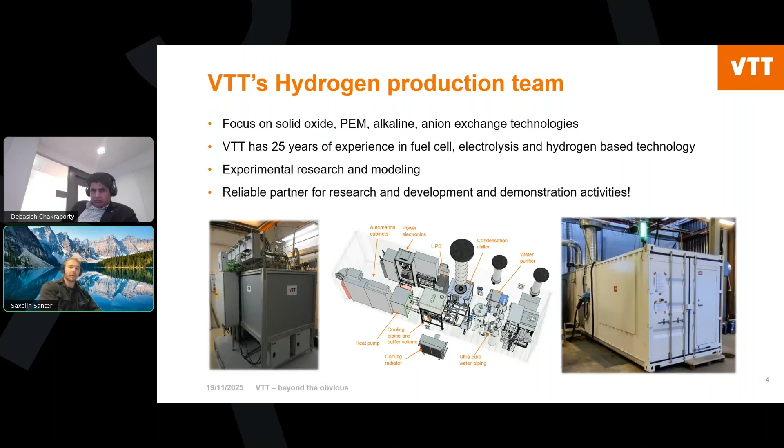Okay, so what is ammonia? Basically, ammonia, when it's used as a fuel, is a hydrogen carrier. The molecule itself contains 3 atoms of hydrogen and doesn't include any carbon. So this means that when ammonia is combusted or oxidized, it doesn't produce any carbon dioxide emissions, which is basically the biggest motivation behind this idea of using ammonia as a fuel. However, this requires green hydrogen production, so we also need to handle that.

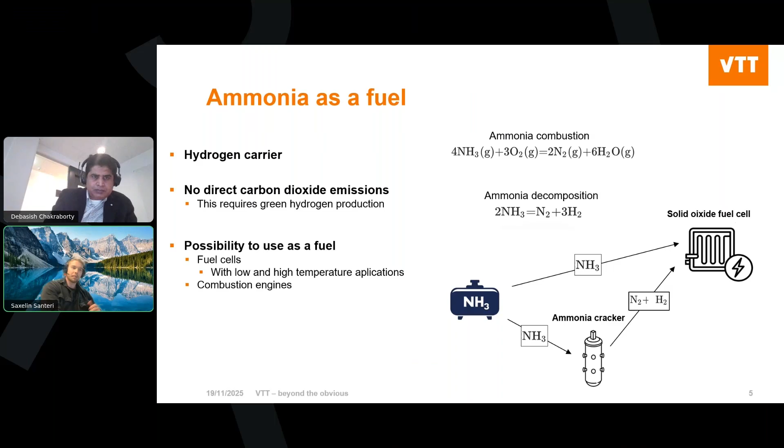Ammonia can basically be used in 2 different ways. You can use ammonia directly, for example, with the solid oxide fuel cell, where the ammonia is used to create electricity or power for some device or application. Or you can crack the ammonia to hydrogen and nitrogen and then use that fuel feed in the solid oxide fuel cell or combustion engine. That would probably be the most practical way, to crack the ammonia to a degree that it's manageable to use in the devices. But on this topic, we will hear more in the later presentations.

Another motivation behind ammonia is the energy density it has. It has quite high volumetric energy density. For example, if you compare it to hydrogen, it's even a bit better than liquefied hydrogen, because it has a considerably low point where it liquefies. So already at 8.6 bars at room temperature, you can have liquid ammonia. So it's easily stored in containers or gas bottles.

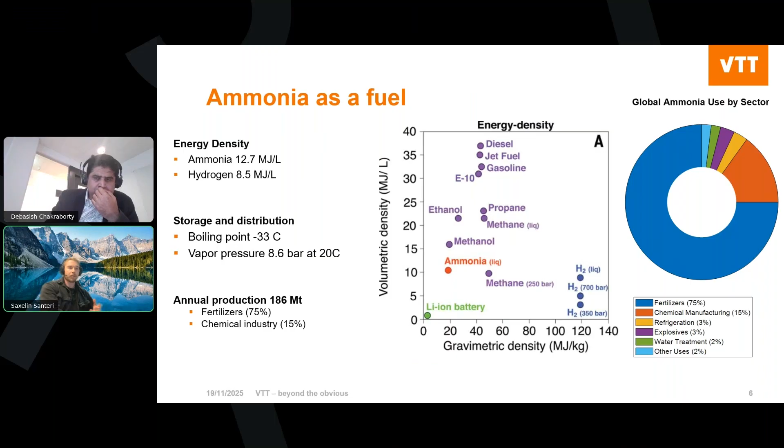It's also quite widely used in industry, for example, in the fertilizer and chemical industry. So it's not that new a substance to be used, and we already have ways to deal with ammonia. But then the issues with ammonia, basically,

And you can see it's already damaged quite a lot. So basically, the ammonia has nitrated the whole sample into ceramics. So we need to find a way to handle the ammonia in the high temperatures.

Other issue is the safety. So ammonia is an extremely hazardous substance. It's causing damage to the cells and tissues. Already at 30 ppm level of concentration, it's considered harmful if you are exposed over longer time, and 5,000 ppm when it's inhaled, it can already cause death. So it needs to be handled carefully if you want to use it safely.

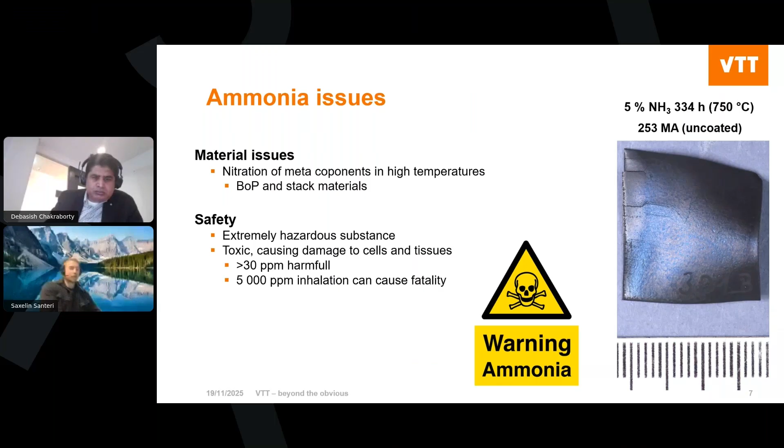Then the introduction to the FUELSOME project, which was the trigger for having this workshop from our side. So in this project, the aim is to develop a solid oxide fuel cell technology for long distance shipping applications that can be run with ammonia and methanol. The project was started in 2022. It has 2.5 million euros of EU budget, and it's a 4-year project. So at the moment we are in the last year of the project. And in the consortium, we have eight partners.

To give you an idea what we are actually doing in the project, I'm going to go through the objectives and give details on whose responsibility is each objective. So the first one is to design and model a complete technology concept from production to end use, taking into account the fuel quality and storage and distribution requirements for this technology concept. This is the responsibility of AEE and Warsaw University of Technology.

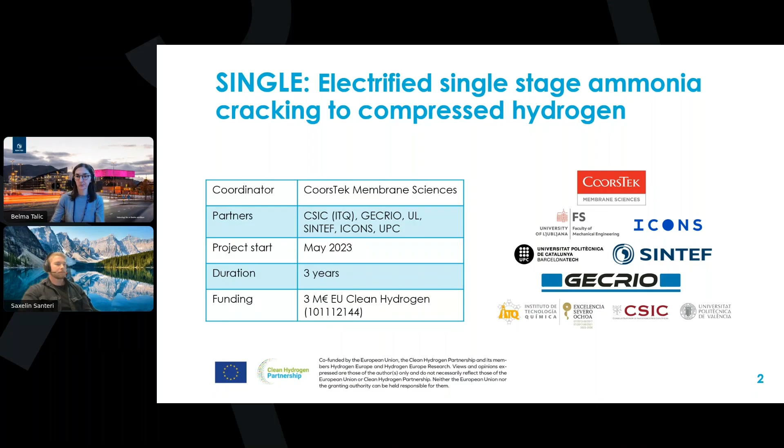The overall aim of the SINGLE project is to develop and demonstrate an ammonia cracker module that's able to produce 10 kilograms of hydrogen per day. The system itself is based on a so-called proton conducting ceramic electrochemical reactor, which integrates the processes of ammonia cracking inside with hydrogen-nitrogen separation across the membrane and electrochemical compression of hydrogen into one single-stage process.

This process intensification allows for tight coupling between, on one hand, the endothermic ammonia decomposition reaction, and on the other side, the exothermic processes of hydrogen separation and compression, which enables us to potentially increase the overall energy efficiency of the cracking.

The reactor itself and the module will be operated at temperatures up to 750 degrees centigrade, aiming to deliver hydrogen up to 30 bars. Because of this proton conducting membrane, the proton conductivity of the membrane relies on humidified feeds.

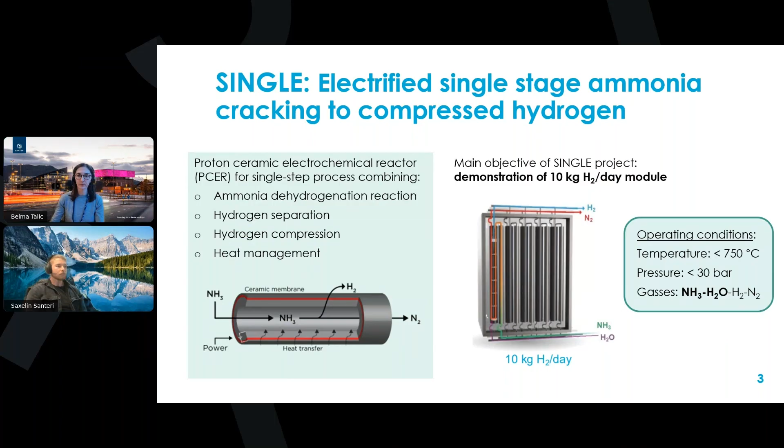The system will be exposed to wet ammonia containing gas mixtures. So in addition to the proton ceramic membrane, which is really the core technology, our ammonia cracker system will also include several so-called balance of plant components.

These are typically heat exchangers, pumps, valves, piping, and so on, which will all be exposed to wet pressurized ammonia at high temperature.

There's a lot of knowledge available on the nitridation resistance of alloys from, for example, ammonia synthesis and nitriding of steels. But most of this knowledge is based on dry conditions and also at slightly lower temperatures than the maximum operating temperature that we are aiming for in SINGLE.

So one of the key tasks of the SINGLE project was to identify alloys which were able to tolerate the specific operating conditions that we have, so that we can operate it safely.

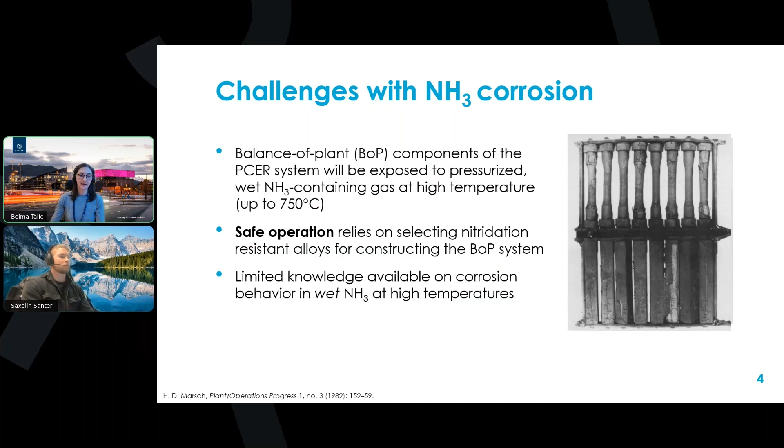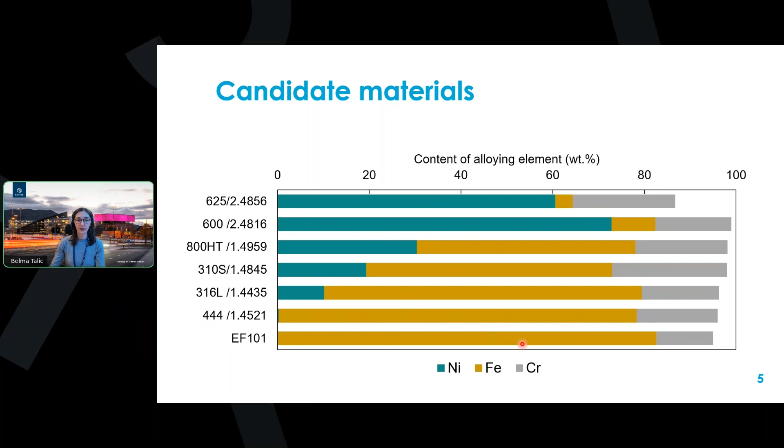Compositions span from high nickel and low iron content on the top here, to low or no nickel content and high iron content at the bottom.

To study the nitridation resistance of these alloys, we at SINTEF established a dedicated ammonia corrosion rig that allows us to carry out exposures to ammonia containing gas mixtures at up to 20 bars of total pressure and temperatures up to 900 degrees centigrade.

The system is made with an in-house gas mixer where we can send in nitrogen and hydrogen gases and mix them with liquid ammonia and liquid water, heat everything up to evaporate the liquids, and mix them together before sending it into the reactor.

The rig itself is located in a dedicated ammonia lab where we have high ventilation capacity, several ammonia sensors, and other necessary safety features to operate safely.

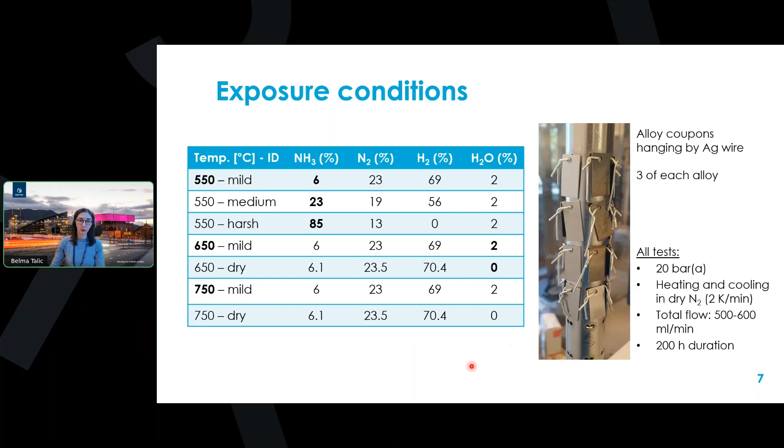All of these 7 exposures were done at 20 bars of total pressure for 200 hours duration. And we did heating and cooling in a dry nitrogen atmosphere.

To evaluate the nitridation resistance, we recorded the weight of the alloy before and after exposure to ammonia. Generally, we saw that the mass gain corresponded quite well with the extent of nitridation.

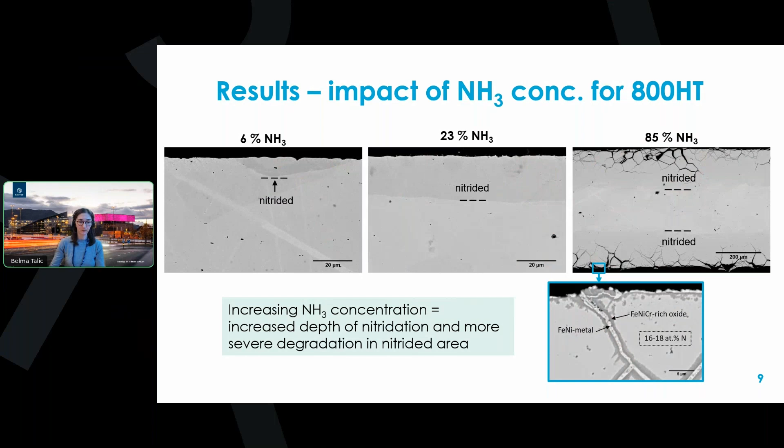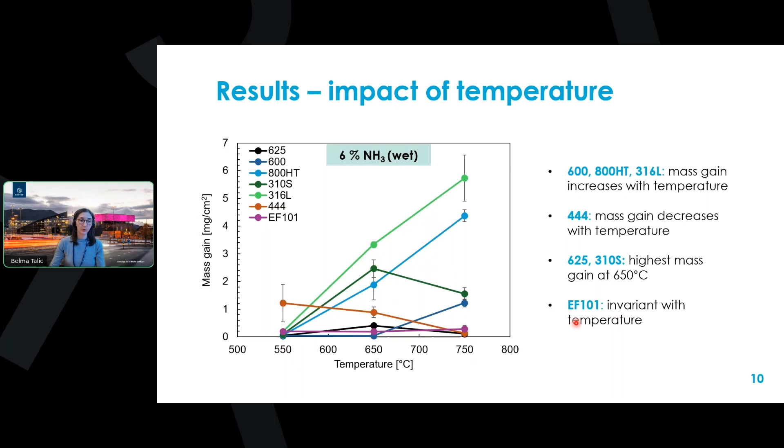The alloy 625 and 310S had a peak at 650 degrees centigrade, but again 625 was quite low on mass gain at all conditions. Finally, the alumina forming EF101 was quite invariant with temperature.

The differences in temperature dependence of the different alloys can, to a large degree, be understood if we inspect the sample cross-sections in SEM. Here we see the ferritic stainless steel 444 and the nickel-based alloy 600, shown at 6% ammonia, at 550, 650, and 750 degrees centigrade.

For 444, at 550 degrees there's an even layer that has become nitrided, with some cracking starting to occur in the nitrided zone. When we increase the temperature, we see increased depth of nitridation, but the nitrogen content has slightly decreased, and we don't see any cracking anymore. Then at 750 degrees, for this alloy, we don't see any nitrogen anymore.

Instead, we see that a surface scale has formed on top of the alloy. With EDS and XRD, we could see that the scale was composed of silica closest to the alloy, followed by chromia and manganese chromium spinel.

As already mentioned, these tests were done with humidified conditions, 2% steam. It is clear that the added steam was sufficiently high in oxygen partial pressure to oxidize this alloy, and the oxide layer that formed probably acted as a barrier against nitridation.

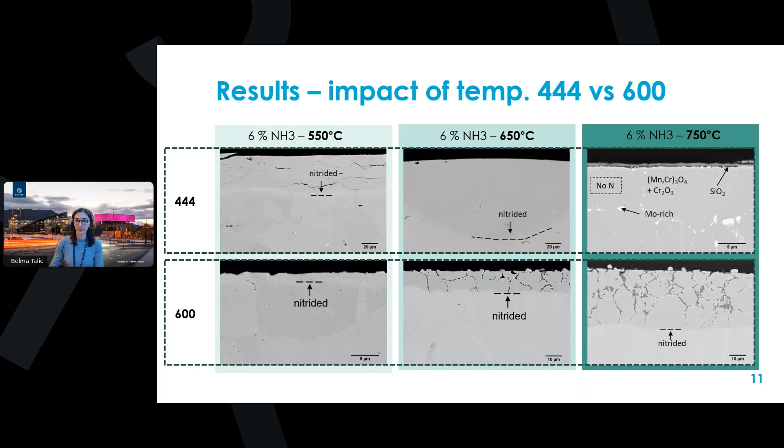The final results that I will show are on the impact of steam, which we compared at 650 and 750 degrees centigrade, in both cases with 6% ammonia. Also in this case, the impact of steam depends on the type of alloy. For most of them, we see the same tendency at 650 and 750, so I'll remove the 750 to add some key points here.

For alloys 625, 600, 800 HT, and 316L, we see that the mass gain is lower in dry conditions, while for the ferritic steels 444 and EF101, we see that the mass gain is lower in wet conditions.

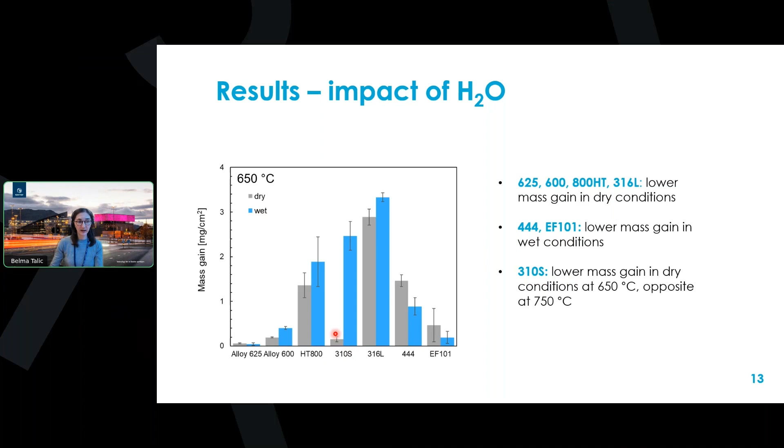So I said that for most of the alloys this was the same at the two temperatures. The only exception is the 310S, which at 650, shown here, had the lowest mass gain in dry conditions, while at 750 we had the lowest mass gain in wet conditions.

Again, we look to the SEM to gain a better understanding of what is going on, using the alloys 444 and 600 as examples. For 444, we already saw that in wet conditions at 750 degrees, we were able to mitigate nitridation by forming a continuous oxide scale on the surface.

When we switch to dry conditions, the partial pressure of oxygen is insufficient to cause any oxidation of the alloy. So instead, we are allowing nitrogen to go into the alloy and react, forming chromium nitrides.

For alloy 600, we see that the extent of nitridation, as we saw from the mass gain, is lower in dry conditions than in wet conditions.

To understand this, we measured the degree of ammonia decomposition at the outlet of the test reactor using FTIR gas analysis. What we saw from this was that at 750 degrees in wet conditions, more of the ammonia was retained at the outlet compared to dry conditions.

In other words, we had more cracking of ammonia inside the reactor in dry conditions than in wet. So in practice, the alloys were exposed to a higher concentration of ammonia in wet conditions than in dry conditions, and this is probably why we see a higher degree of nitridation in wet.

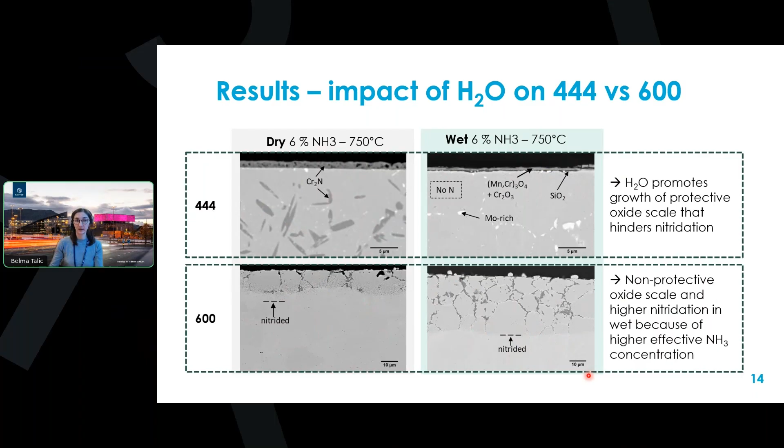So I finally reached the conclusion. In summary, what we saw from this study, studying 7 different alloys and 7 different exposure conditions, is that generally nitridation resistance increases with decreasing iron content and increasing nickel content of the alloy.

We saw that the ammonia concentration had a very large impact on the nitridation potential, and it led to increased degradation of most of the alloys.

We also saw that increasing temperature and wet ammonia increased nitridation of many alloys, but for some, such as the ferritic stainless steel 444, it can actually mitigate nitridation because it promotes formation of an oxide scale.

Steam had an impact on both oxide scale formation and ammonia decomposition. So depending on the type of alloy, it can both decrease and increase nitridation of the alloy.

And finally, we concluded that alloy 625 was the alloy we tested that had the best resistance when we considered all of the different testing conditions.

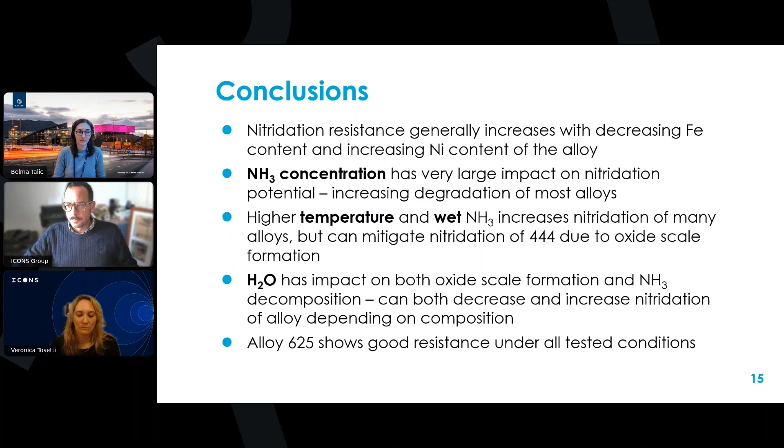The second is actually a funny question. So I saw that you're using 316L tubes. Do you inspect any damage on the tubes, or how often do you need to change them?

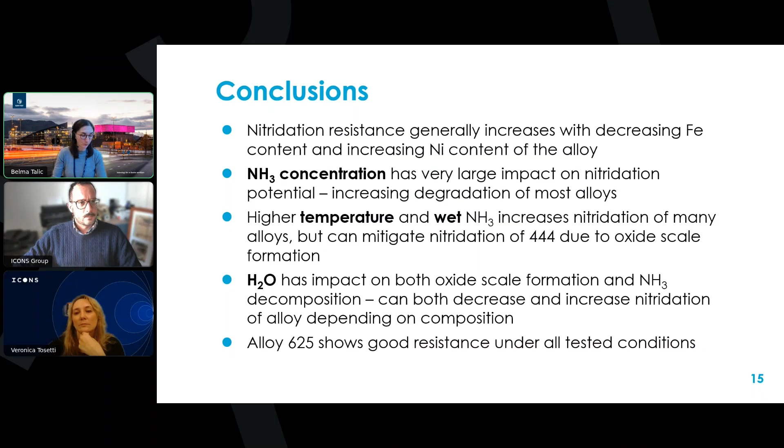Thank you, thanks a lot for those questions. Regarding the chromium evaporation, I don't believe that it's impacting our mass gain results that much. We should remember that although we're adding 2% steam, the atmosphere otherwise is quite reducing because we have such a high concentration of ammonia. In order to have significant evaporation of chromium, we would need a higher partial pressure of oxygen as well, I would think. I haven't seen any measurements of evaporation in these conditions, but at least in hydrogen mixtures, the evaporation of chromium is greatly reduced compared to oxidizing wet conditions. But of course, we cannot rule out that it's not influencing it to a small degree.

But what we can say is that when we compare our SEM analysis, looking at the depth of nitridation and the amount of nitrogen dissolved in the alloy, and compare that to the mass gain data, there's a very good correlation between the two. So the majority of the mass gain that we are measuring is because of nitrogen going into the alloys.

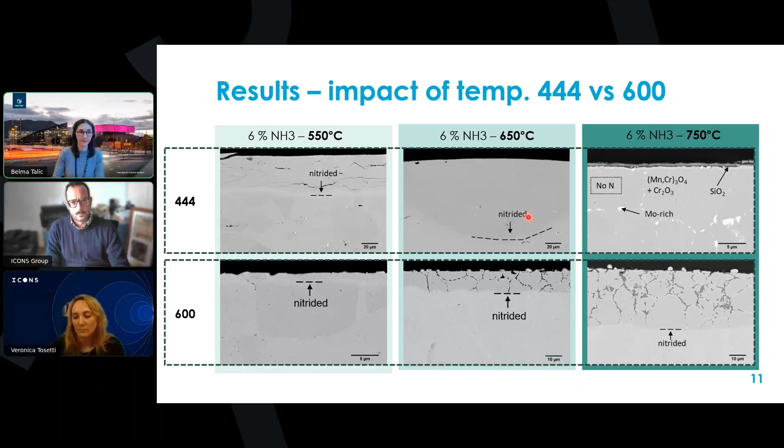For the second question regarding the test setup, that's something we spent a long time evaluating and are continuously evaluating. For this steel-based reactor, which is in the hot zone of the furnace, we initially used alloy 800 HT, but we switched after seeing the initial results from testing here.

We switched to alloy 625 because that was more nitridation resistant. For the gas tubing, the heated zone is made of Inconel 600, and the cold zone is made of 316 components. The Swagelok components are also 316. We've checked with laser thermometers to ensure the temperature of these Swagelok components is sufficiently low where we don't have significant nitridation.

But it is something we're paying close attention to, and we occasionally take out parts of the rig and inspect them, trying to get an understanding of when we have to replace the different components in order to operate safely. So I hope that answered your question.

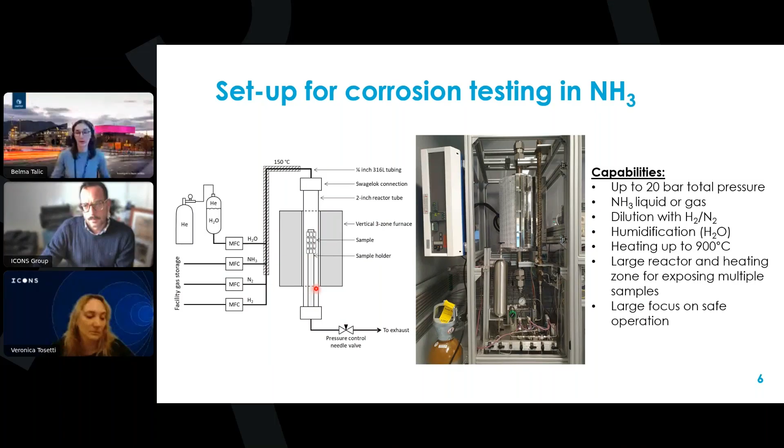As I mentioned, we have 3 samples of each type arranged on top of each other. Generally, under most conditions, we haven't really seen any systematic variation in the mass gain that corresponds to the direction of ammonia flow.

The only exception was at 750 degrees and dry conditions. But in that case we had quite a lot of cracking in the reactor - if I remember correctly, we went from 6% at the inlet to slightly below 1% at the outlet. So in that case we saw some variation, with the sample placed on top slightly more affected than the sample at the bottom.

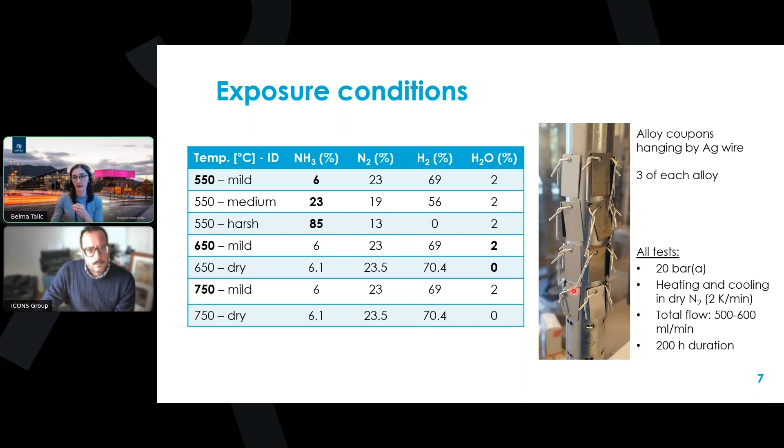In the mass gain results, they're all plotted as an average of the 3 samples, with the error bars showing the variation among them. So you see, for a lot of them, the variation is actually quite small.

For the first question, I'm not sure if I completely understood - was it whether the increase from 2 volume percent steam to a higher steam percentage would have a similar effect? Sorry, could you repeat?

Maybe Peter wants to open the microphone. Hello, hi, I'm Peter, sorry - yeah, this is my question.

If you're thinking about an SOFC system and you'd like to go to a higher recirculation rate, water can appear in the gas. So that's the main point of my question - how effective is it if we go much higher with volume percent of water, steam?

I think it's a good question. Of course, increasing the steam content will increase your partial pressure of oxygen, so for alloys that have a tendency to oxidize, they may oxidize more, or you would have a greater competition between oxidation and nitridation. But the short answer is I don't know - we are hoping to find out.

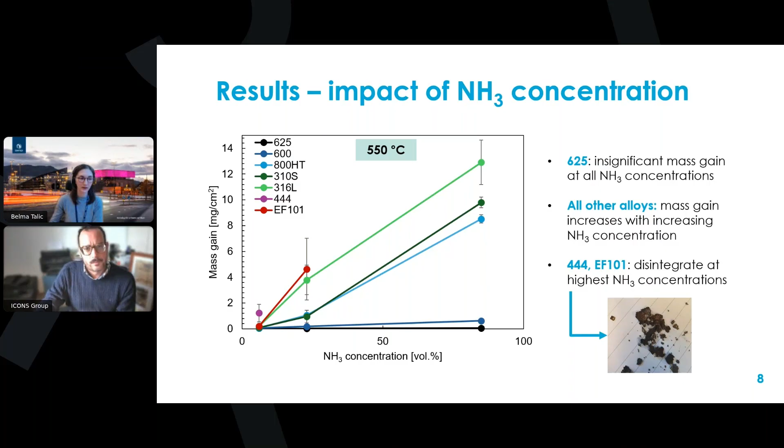The very last question, then we move to the next presentation: how much aluminium was added in the EF101 alloy? Yes, I have the full compositions here. The EF 101 is sort of a trial composition from Kanthal.

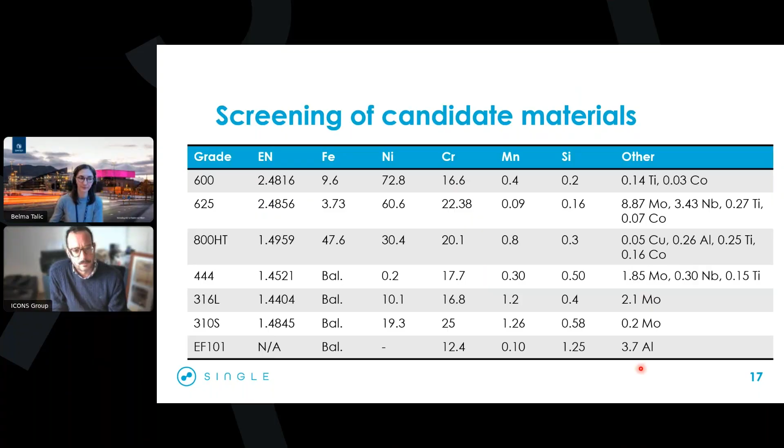It contains 3.7 aluminium. We'll give the floor to Antonio Alfano.

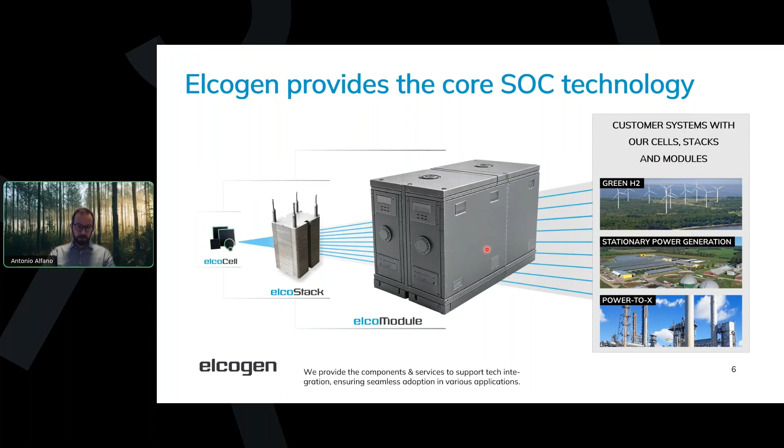And those really fit a broad range of technologies, whether it's green hydrogen production, stationary power generation, or more in general Power-to-X applications. In all these products, there is a lot of development, like we mentioned, and this would not be possible without the backing of European or publicly funded projects.

But now let's go a bit more into the topic of this webinar, and specifically what I would talk more about is how our stacks behave with ammonia, how they work there, and these are again specifically supported within this FUELSOME project. Really briefly, although it has already been mentioned a couple of times, what happens when you start feeding ammonia to a solid oxide fuel cell.

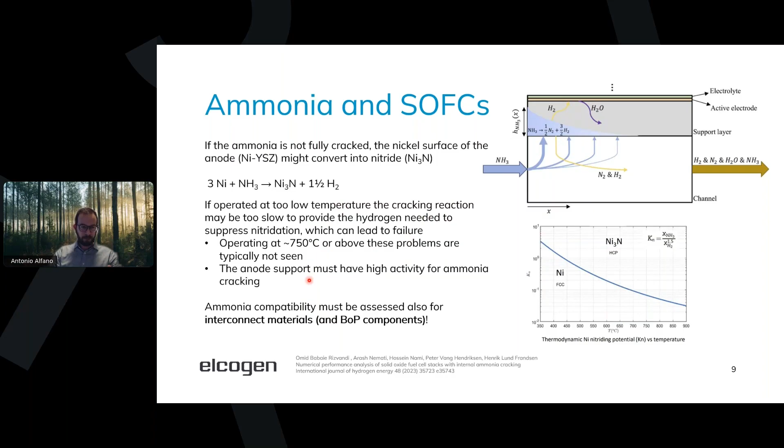But again, like we have also seen thoroughly during the previous presentation, it's not only the unit cell, but all the other BOP components and the stack components themselves that need to be assessed for their tolerance against ammonia. And this is what we're addressing within the FUELSOME project. This has already been presented by Santeri at the beginning, so I will not discuss it further, but I will just focus on what we are doing.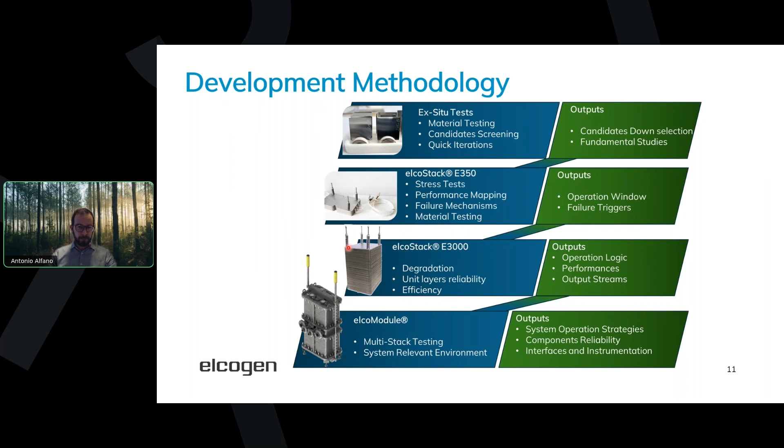We have seen already quite a few examples about how coupons of different metals react to ammonia. What we have also done within this FUELSOME project together with VTT is studying how those materials react for different temperatures, different operating conditions. Different steels were tested. We also tested protective coatings, 3 of them in different variants of thickness, exposed to different temperatures.

And I believe you see something familiar from previous slides. You still have candidates which essentially are destroyed at the end of the test, others which are looking pretty good, but it shows that this is already a good screening to down select some of the candidates which are suitable for operation with ammonia.

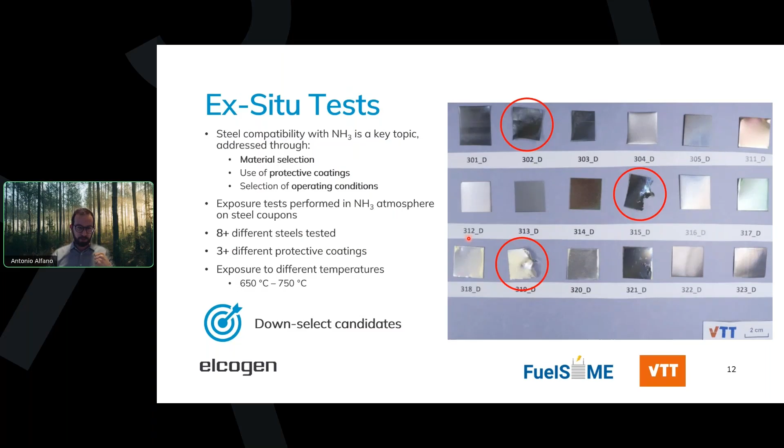The next step from there is short stack testing. So a 15 layer stack, and then we started feeding increasing amounts of ammonia. One of the peculiarities of our stack platform is that the proprietary cell technology enables it to work at a very low temperature. The stack is effective already at 600 degrees C. So we're feeding ammonia at a relatively low temperature compared to many other solid oxide fuel cell stacks.

What we have done here, we kept the stack under current. This is the average cell voltage over time, and we gradually increased the amount of ammonia fed to the stack while keeping fuel utilization constant through mass flow controllers, adjusting the hydrogen flow rate. In between every step, you see this blank space. This is where we were doing reference measurements at open circuit voltage to check the gas tightness of all the layers.

You can probably see that for up to 2.5 volume percent of ammonia, the voltage was not substantially changing. We still see a decrease, because the endothermic reaction of cracking ammonia decreases the voltage through the temperature decrease. So this is coherent with the results. But when you go to very high ammonia content, you start to see that the voltage stability is more or less affected.

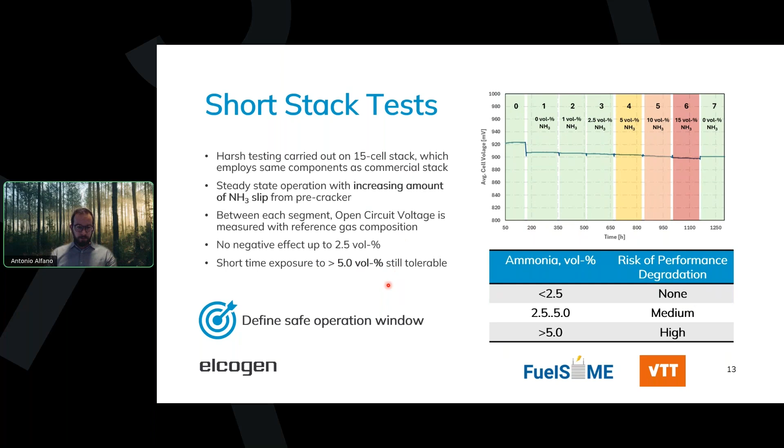And this is a good feedback in terms of development and setting the parameters for the pre-cracker units. From here, we went one step forward. Taking the information from here, we went to this 6 kilowatt module, where we used around 3% of ammonia in the fuel inlet composition. The rest was cracked with the pre-cracker unit. And then we started doing some performance mapping.

What we were able to achieve was to meet the project KPIs in terms of electrical efficiency. At stack level, we achieved at the rated power, which was 6 kilowatt, close to 60% electrical efficiency. So this is, again, a good indication, because we have seen thoroughly that the material challenges are applicable to all levels of integration. It's not only the stack.

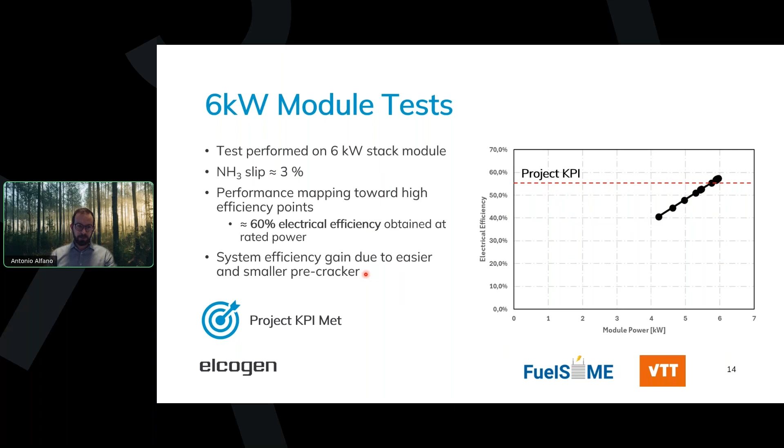And to make sure that you would crack completely the ammonia before reaching the stack, you would need to really sacrifice and oversize also the pre-cracking units. But if you have a stack which is actually tolerant to some of the ammonia, you could still optimize your system design to maximize the overall efficiency.

But in conclusion, what I would like to emphasize is that really making next generation energy systems based on ammonia and solid oxide fuel cells is possible and can be achieved, but it really requires a kind of a synergistic effort, which really goes from stack to BOP components to really bring all the things together and optimize them, taking into account the material challenges which apply to all the components which are eventually in the system.

Elcogen stacks have been demonstrated to be able to operate with ammonia, with a fuel composition which contains some uncracked ammonia, even at relatively low temperature, close to 600 and 650 Celsius degree, achieving close to 60% electrical efficiency. Again, a good showcase also for the stack platform, which is one, but is able to fit many different applications. Again, possibility to operate with different fuels, different operation modes, so that the same product can really fit a broad range of commercial applications.

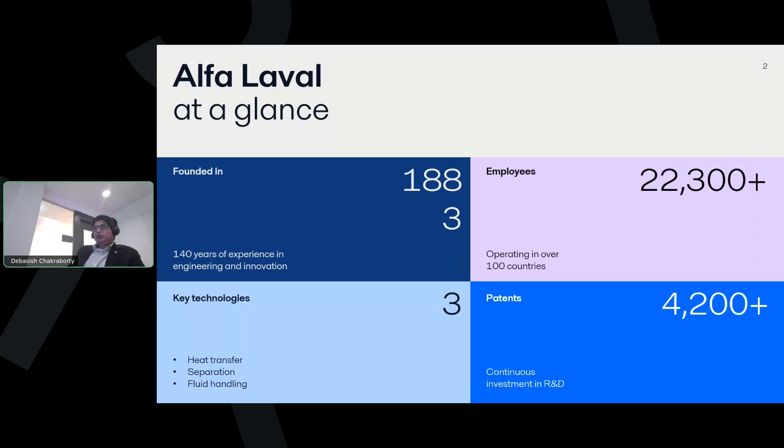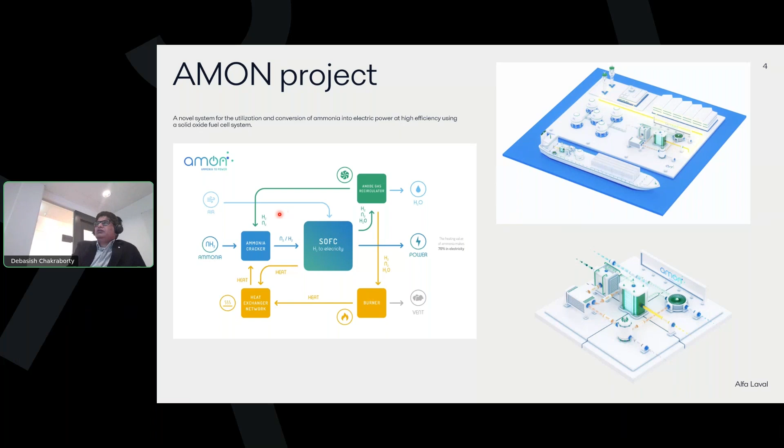Okay, I just, this has been described. So, you know, ammonia is like the perfect fuel for SOFC. A lot of hydrogen, easy to store ammonia, and then there is no carbon dioxide emission.

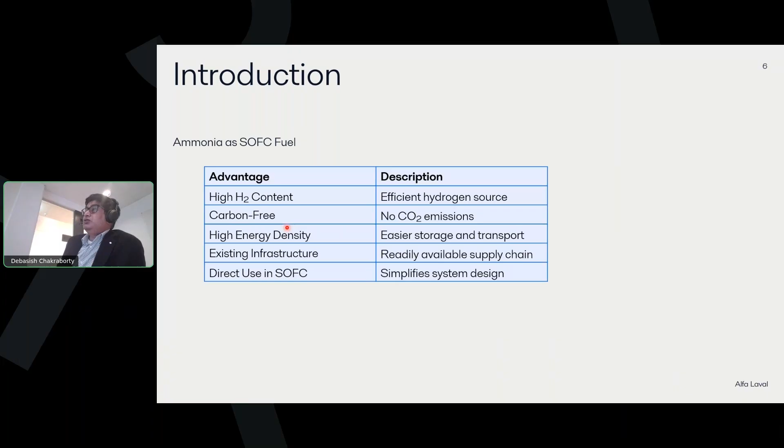However, there are a lot of challenges that we have been figuring out, and that's the material degradation. When we are talking about stainless steel, I'm not talking about exotic materials which are very expensive, but nothing could tolerate ammonia at this elevated temperature.

This is 310S exposed to pure ammonia at 6.5 hours at 600 degrees centigrade, and see what happens to this. This is terrible, right?

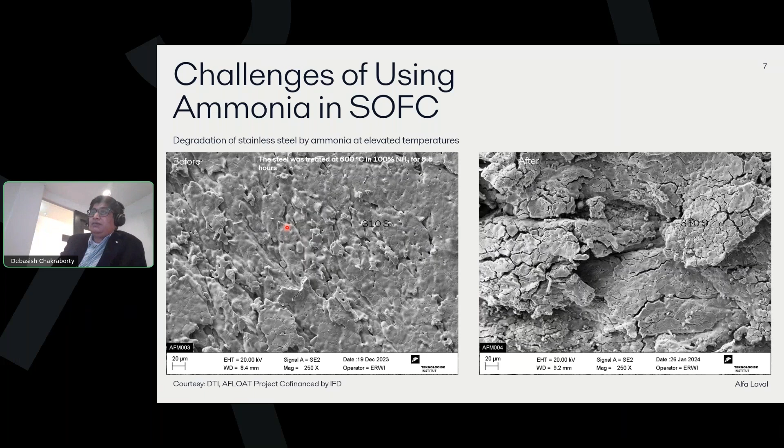Before and after. If you see what is in there after exposing to ammonia - this is 100% ammonia, just so you remember - you see a lot of nitride. There is also oxide, that was a surprise to us, but there's a lot of nitride that is formed.

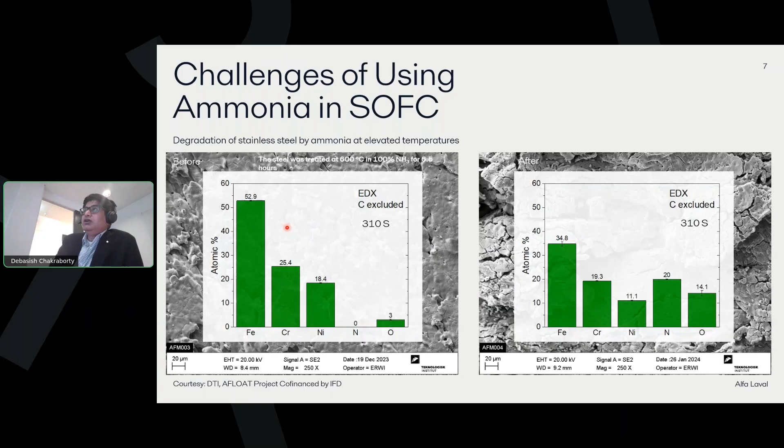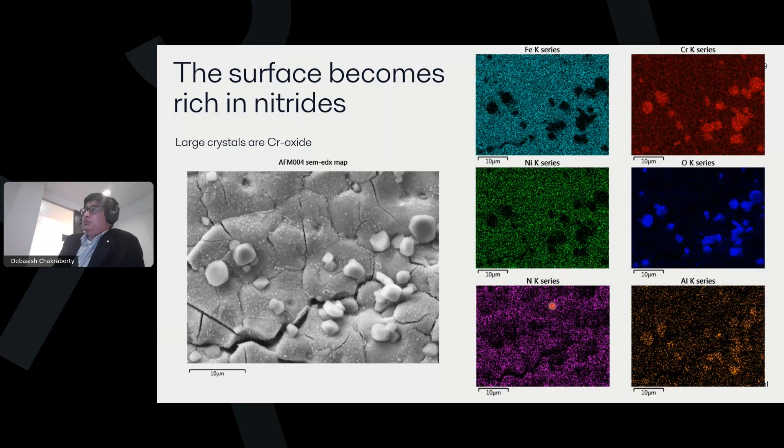And if you see close up, you see this kind of big crystals on the surface, and these are actually oxides - chromium oxides - but you also see a huge amount of nitrogen on the surface. So the surface layer, the protective layer, the chromium oxide layer, is totally disintegrated when exposed to ammonia at these temperatures.

If you see what happens when the exposure time increases, you see more nitride forming. So the amount of nitrogen increases, and this is just 24 hours. We're talking about 20,000 hours or 10,000 hours of durability for this kind of thing, right? So it's really challenging.

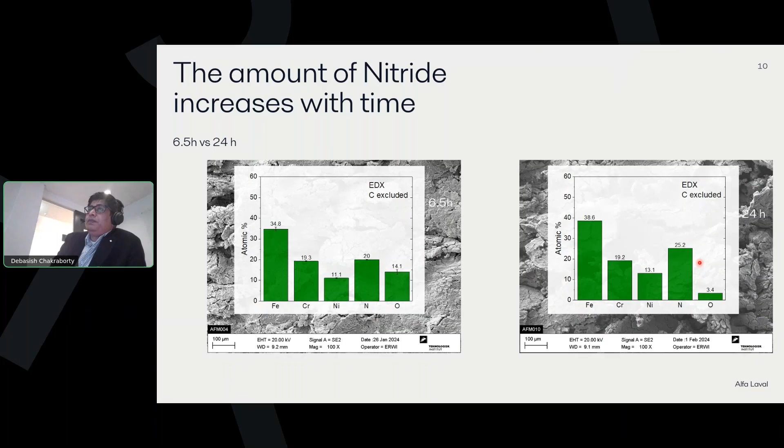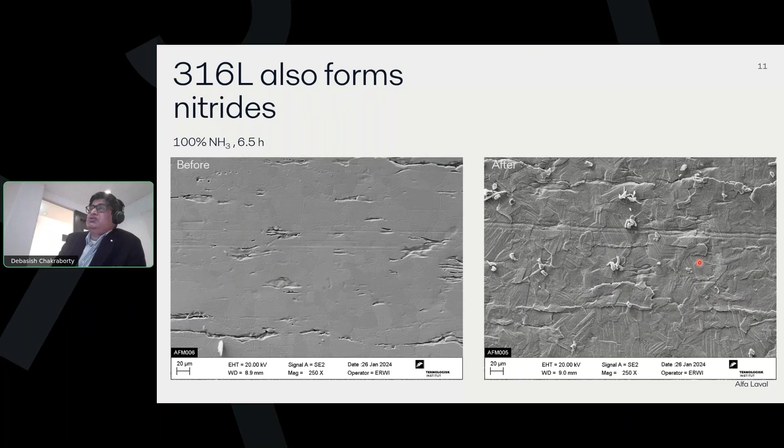And then this is 316L. After treatment it looks not as bad as 310 visually, but you still see a lot of nitrogen. So nitride is forming, and the chromium oxide layer is gone.

And what are the reasons? The main reason is the availability of atomic nitrogen, because somehow this chromium oxide, a little bit of it, or some little bit of exposed metal, dissociates ammonia, and you get atomic nitrogen and hydrogen, which also reduces the protective chromium oxide layer.

As you can see, all the elements that protect stainless steel against corrosion, like chromium, iron, nickel, they all have quite a high affinity towards nitride formation. So the entire structure disintegrates, and this is something that we cannot really avoid. When the temperature is elevated and you have ammonia, there will be significant corrosion.

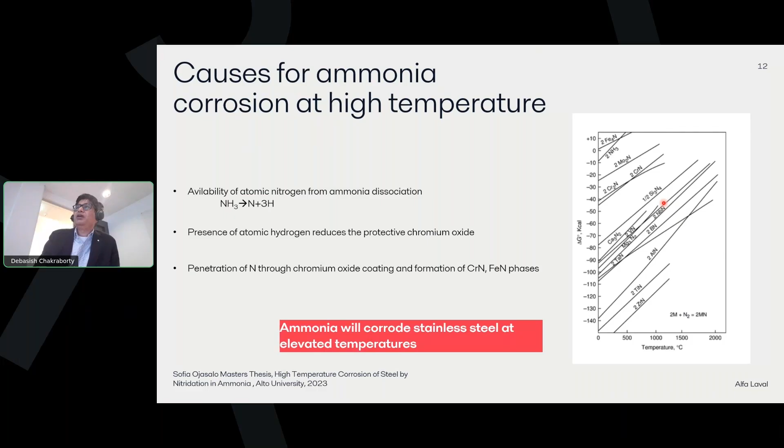Okay, then what are the strategies? There is no way to avoid corrosion, so you need to come up with some strategy. This is something that we try to follow: a thermal barrier coating.

This thermal barrier coating could be a ceramic, like yttria-stabilized zirconia, and this could lower the temperature, because lower temperature means less dissociation of ammonia, and in that way reduces the nitrogen atom concentration on the surface.

A protective layer that could be used is alpha alumina, because alpha alumina is pretty much non-penetrable to nitrogen. As you can see at 700 degrees, the diffusivity is on the order of 10 to the power -12 for alumina compared to 10 to the power -16 for chromia.

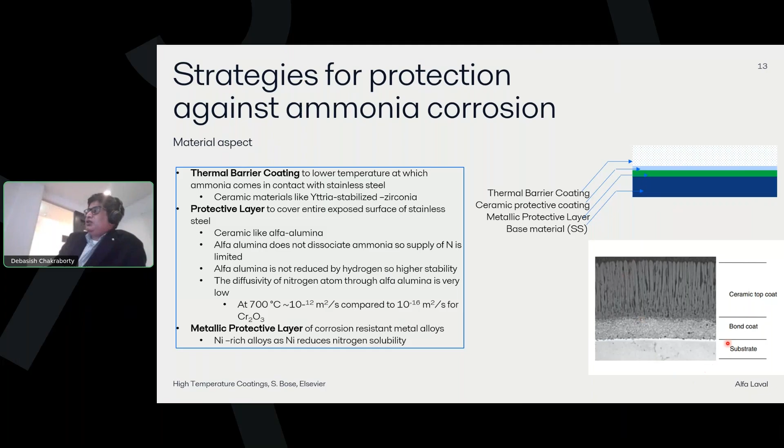And then there is a metallic protective layer that could be applied - a nickel-rich layer. As we have already seen before, nickel reduces the solubility of nitrogen in the metal. When you do that, it could look something like this. So this could be a good protective layer, and depending on your application, you have to choose.

And then there are challenges like adhesion and compatibility - compatibility with other layers and base material in terms of, for example, thermal expansion coefficients, because they could have different thermal expansion coefficients and things will fall apart.

Then it's very important that the protective layer needs to cover entirely. If you have just a hairline crack, that will be the point of attack. So that is very important, and that's why multi-layer coating is probably a way to go.

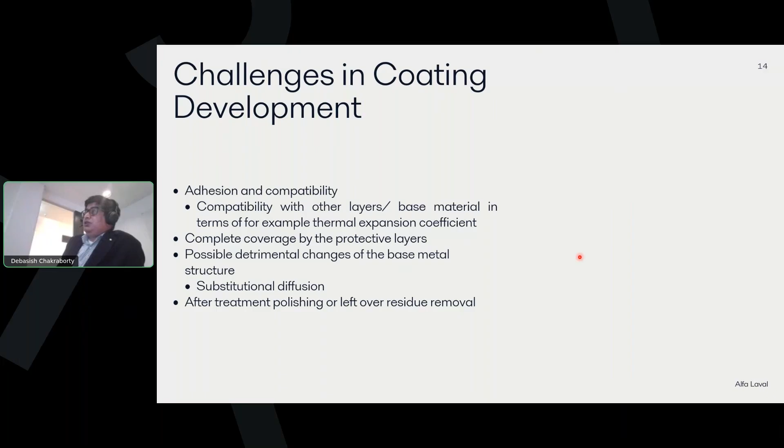And then there are possible detrimental changes in the base metal by substituting the elements of the base metal with the coating material. And then polishing after treatment - this could also pose a lot of challenges. There are different methods available: chemical vapor deposition, physical vapor deposition, thermal spray, slurry method, and one could choose based on what kind of thickness and geometry one is looking for.

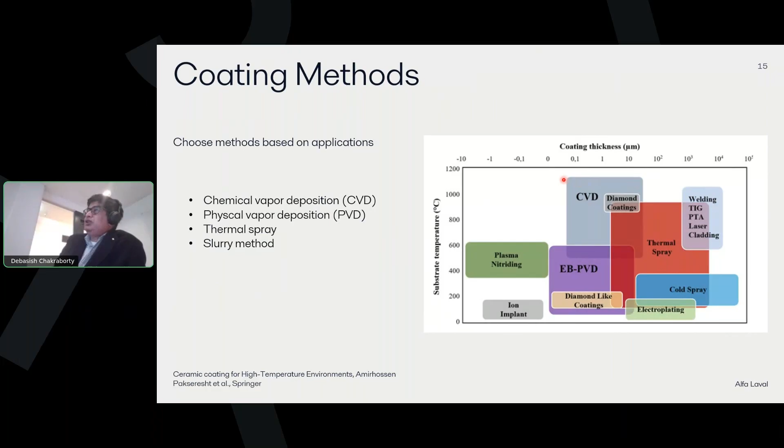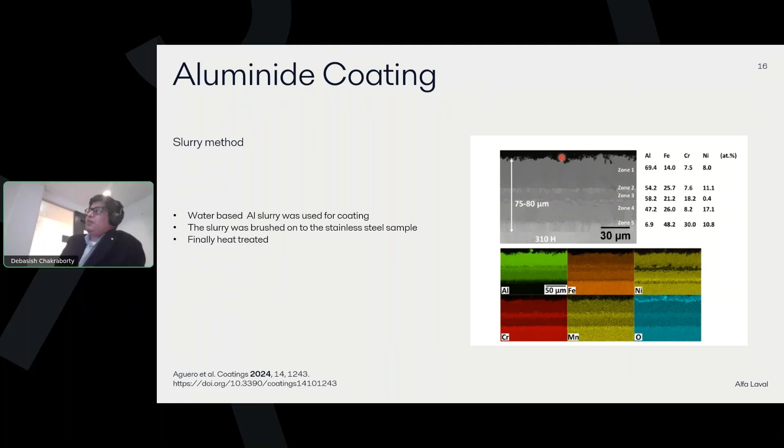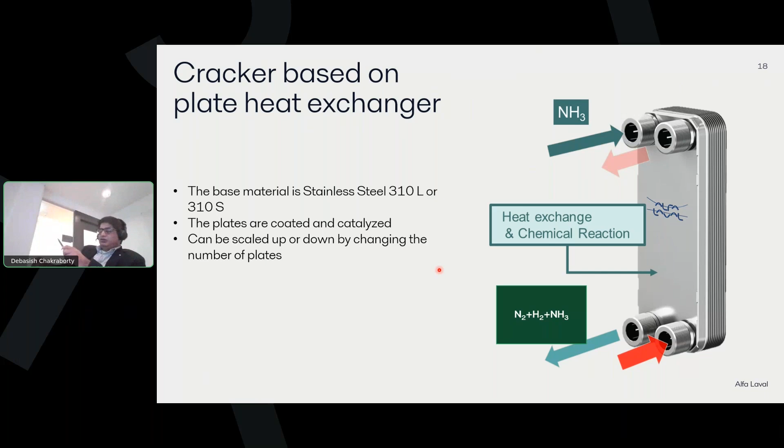So the conclusion is: at elevated temperature, ammonia corrodes stainless steel, it's inevitable. The normal chromium oxide protective layer of stainless steel is not effective because of nitridation. Coating, especially multi-layer coating, can prevent ammonia corrosion, so you should think about that. For SOFC-based power generation, this is not applicable everywhere, but when ammonia is used as fuel, a cracker can act as the first line of defense. There is a nice compatibility between the outlet exhaust temperature of the SOFC and the cracking temperature.